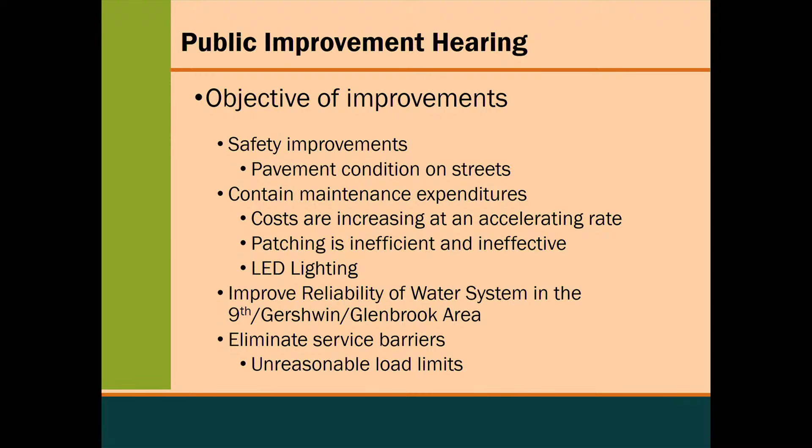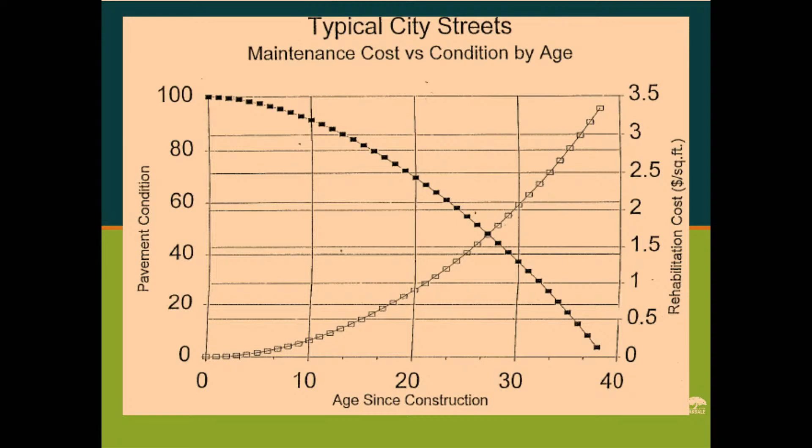The pavement condition on the right side is actually our maintenance costs, and as you see over time, our maintenance costs increase. There gets to be a point - based on data the City of Oakdale has collected - around 28 years of age, where we reach a point of diminishing returns. We're spending a lot of money on maintenance yet our pavement conditions are still depreciating or decreasing. So it comes to a point where we need to do something more than just patch the streets.

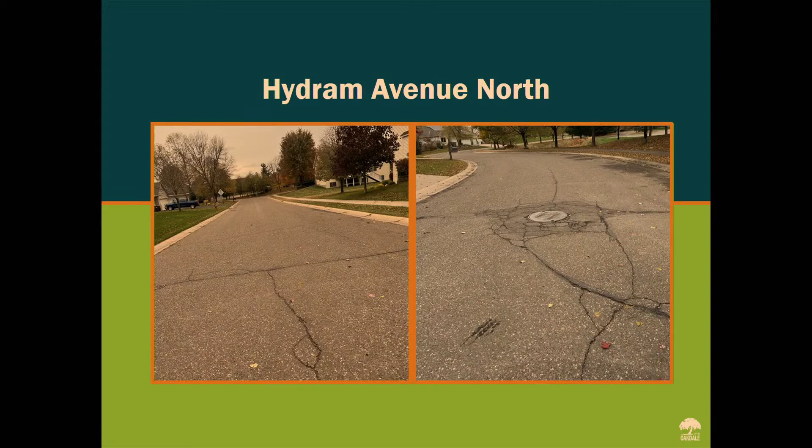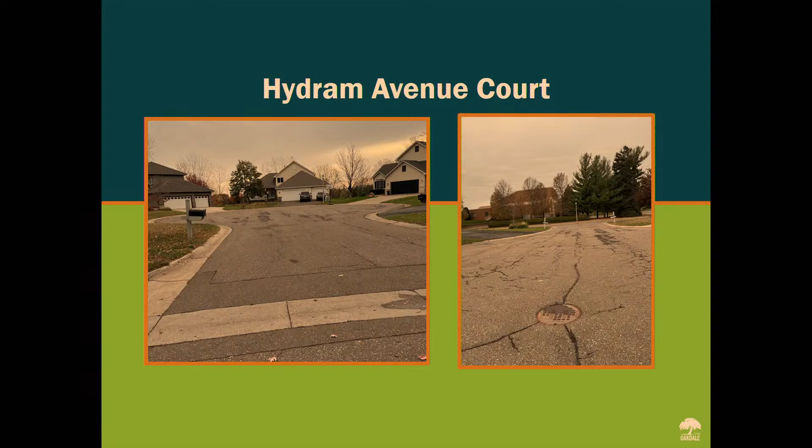Hydram Avenue Court, similar situation. There's a concrete cross gutter on that left picture, and you can see the entire pavement has been patched at one time. And then 17th Street North in that same neighborhood.

So then we'll go through the proposed improvements. There are 5 different areas, as Brian mentioned, and some of the areas have a little bit different character. So I'll go through this as simply as I can, but our main goal, again, is to replace that asphalt pavement.

So the first area are the residential areas by 15th Street and off of Helmo Avenue. In those areas, we will be replacing all the asphalt pavement. Those areas have existing streetlights that meet standards, but they do not have LED fixtures, so those fixtures would be replaced.

Before we replace that pavement section, we want to make sure everything underground is up to standards and in good condition. So Public Works is televising the city sewers at this time, and there may be some spot repairs on the sanitary sewer. There may be some repairs on the storm sewer, some catch basins. Maybe we need to add a catch basin if there's a little bit of a drainage flooding problem in heavy rains. There might be some fire hydrant repairs and gate valve repairs.

And then we will clean out the storm sewer system by the ponds. So the storm sewer pipes that dump into the ponds, there's some sediment that accumulates over time, so this is the best time to clean those areas out. We will review all the street signs in all of the project areas and replace those that need replacing.

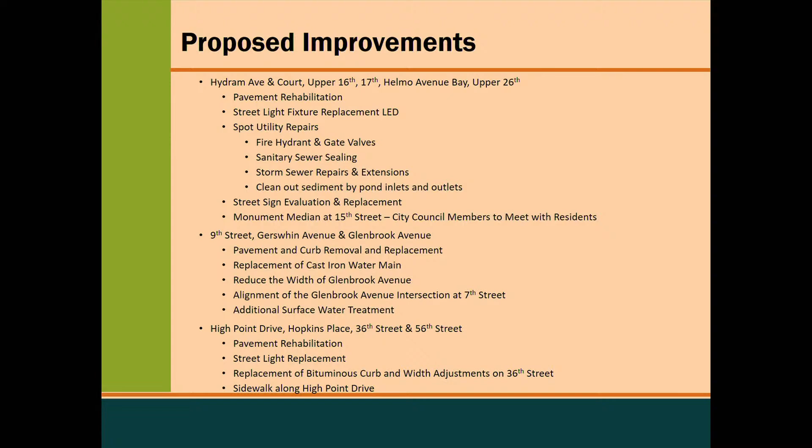So what can you expect to see during construction? Well, the first thing the contractor will do is to reclaim the pavement. They'll bring in a big grinding machine, mix the existing asphalt pavement in with the gravel, and then they'll salvage that and use it on the project.

Before that new asphalt gets put down, we need to take care of some grading, some utility repairs, some curb repairs, and then the street lighting system.

So down in the water main replacement area, that grading, because we're disturbing the subgrade and that subgrade has never been improved in the past, the city standard is to put in 3 feet of good drainable sand because of the soils that exist in the city. So we are proposing to put in 3 feet of drainable sand down in that area. So the grading is more intensive.

In the other areas, the grading will just consist of removing the top 3 to 4 inches of gravel for the new asphalt section. The city has utilities under the street, and there are also private utilities - gas, phone, electric and communication lines. The city has their sanitary sewer, storm sewer, and water mains, so we will be making sure that those are all up to standards and in good condition.

The curb will be totally replaced in the water main replacement area and on the north side of 36th Street. In the rest of the areas, we will replace just the areas that are so severely cracked or settled that it's really affecting the life of the street. So we're not after every cosmetic crack, but we're after the more major cracks, and so you'll see some of that replacement.

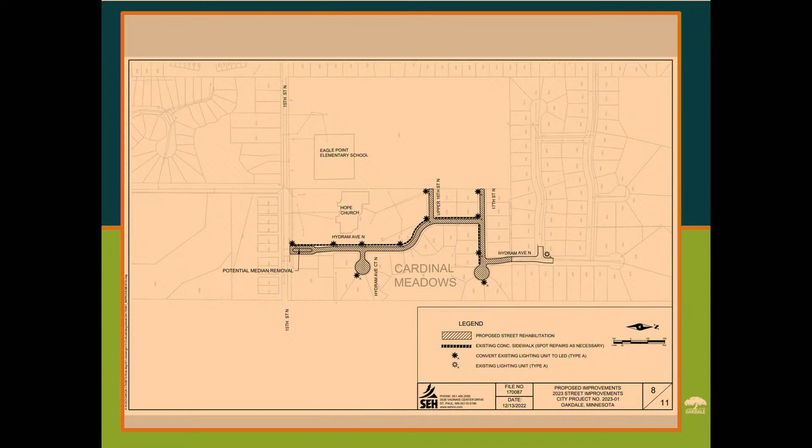So this is the Cardinal Meadows area. Again, some spot repairs on that curb and gutter, total asphalt pavement replacement. The streetlights meet standards, but we'll be replacing the fixtures with LEDs. And then the potential median removal on that south end at 15th.

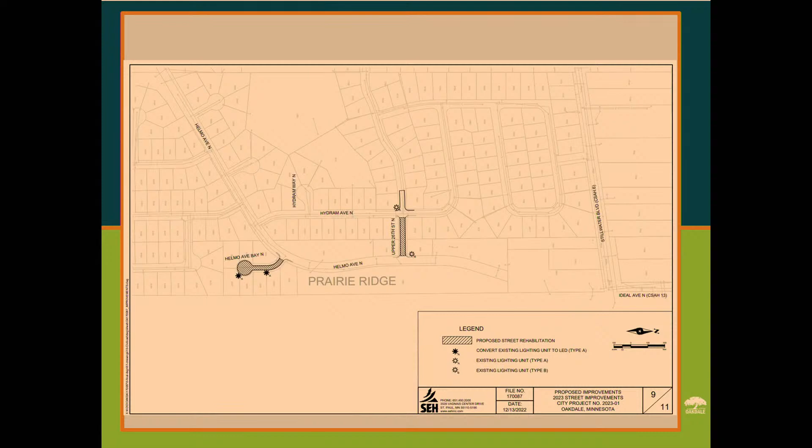Prairie Ridge off of Helmo, similar situation, the curb and gutter will have spot repairs, asphalt replaced, and those lights also meet current standards on Upper 26th, but on Helmo Avenue Bay, they will be upgraded to LED fixtures.

Down near Tanner's Lake, in the water main replacement area, that's the big activity down there. New curb and gutter, new pavement. The streetlights, again, are overhead, so they will remain overhead.

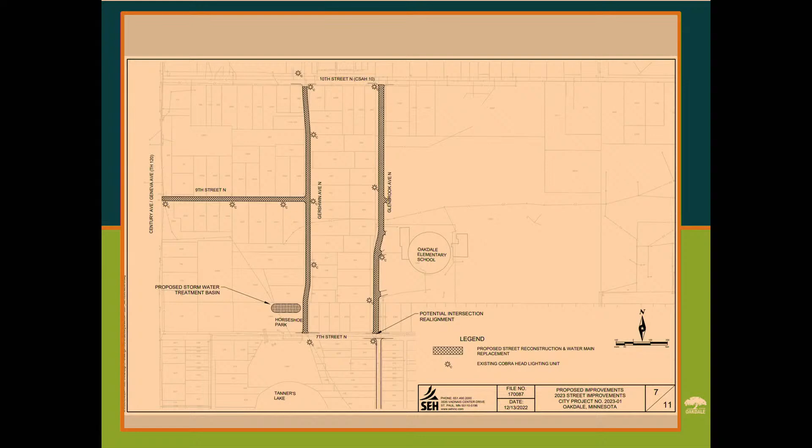And there is some stormwater treatment required. We're proposing that on the north end of Horseshoe Park. And then there's the potential realignment of that Glenbrook intersection down at 7th Street.

The commercial area up by 4Front. The work on High Point and Hopkins is just work in between the existing curb.

New streetlight system with the city standard for the commercial areas, the taller pendant type lights. There's a new sidewalk proposed again on the west side of High Point.

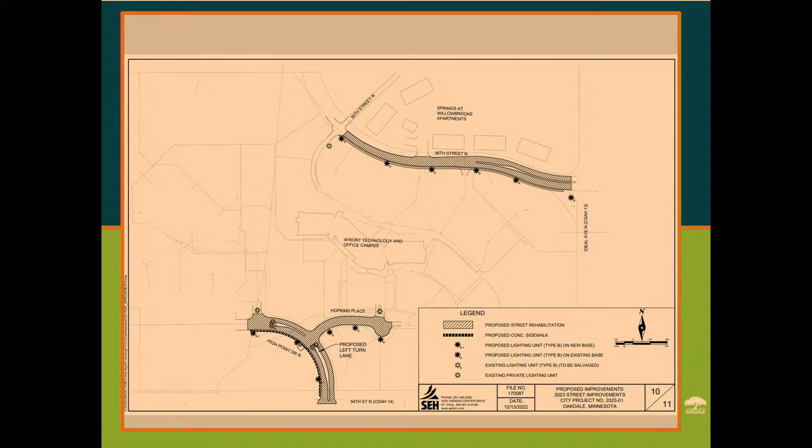Then up on 36th Street, new concrete curb on the north side, new lighting there, pavement replacement, and the trail will also be replaced on the south side of the road.

Then lastly, 56th Street up near Mills, work in between the existing curb and gutter, some spot repairs, pavement replacement, and new standard city commercial streetlights.

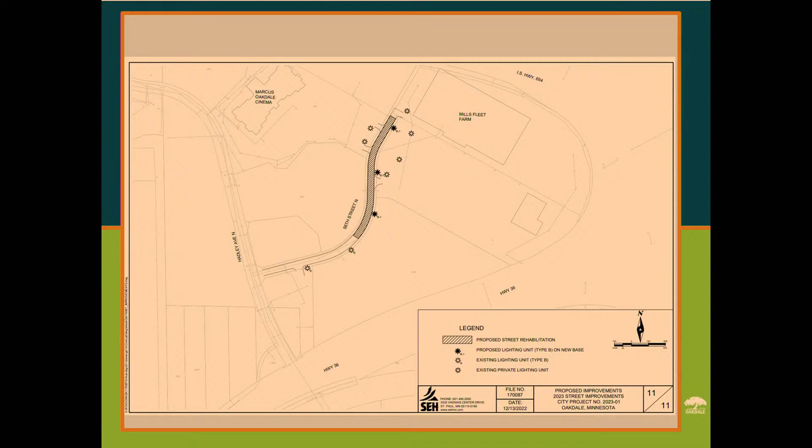These are just some cross sections. It shows down in the water main replacement area that we are proposing a 3-foot sand section, new curb and gutter.

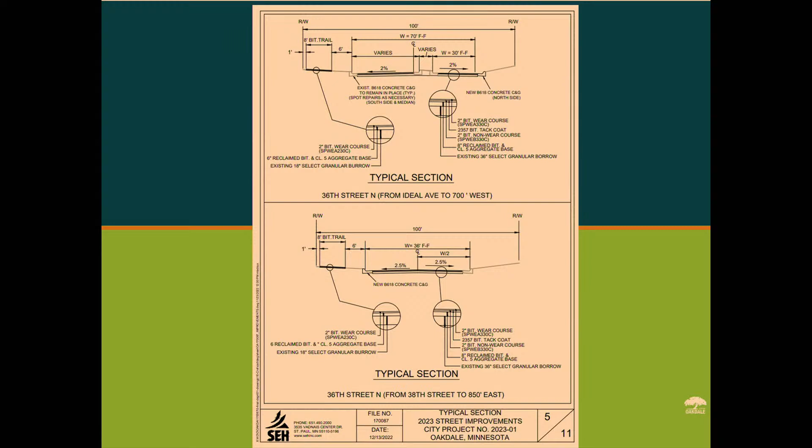And then this is on 36th Street, showing how we transition from the median area to the Willowbrook area, and then the trail replacement on the south side.

So we started this process out by sharing some information in November. There were some videos that were posted and information shared, some letters that went out. The feasibility report, we did a study and a report that was presented to the council in December. These public hearings were ordered.

If the project goes forward tonight, we will work on the construction plans and then bring those back to council on March 28th for approval and approval to bid. A contract could be awarded at the second meeting in April.

And then we really want to just be ready to go around the beginning of May and have a contractor on board, so when the frost is out of the ground, they can start the construction. And then also we want to finish everything except for maybe some minor cleanup by about the end of August. So that is our schedule.

Thank you, Todd. The next part of the process here is to give the residents an opportunity to comment on the proposed improvements, and then for the council to deliberate on the improvements and determine if they want to order the project, and it does require a 4/5 vote.

With that, I turn it back to the mayor. Thank you, Brian. Before we open the public hearing, I'm going to open up to council members to see if there are any questions on the presentation for Brian or Todd.

Yeah, I did have one question. In the south, if we were to consider narrowing the street, would that change the boundary lines or the lines for the owners in that area? Or would the extra space for narrowing the street just remain an easement for the city?

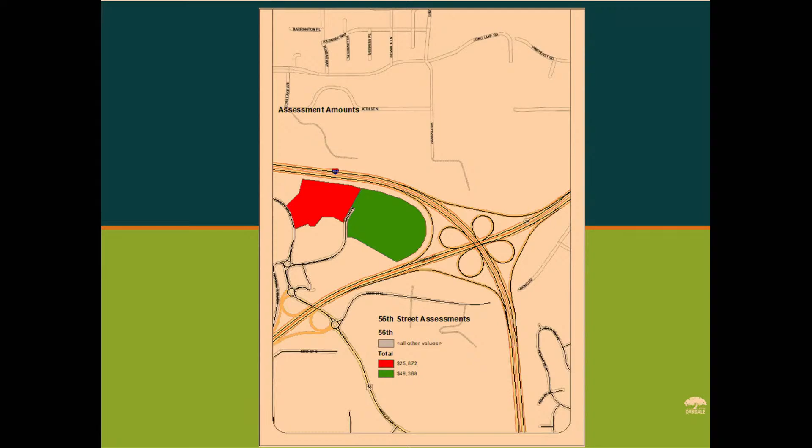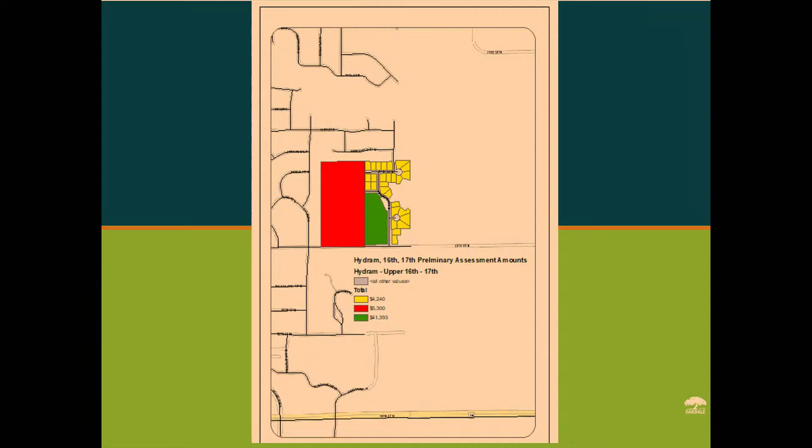This is the Prairie Meadows. These assessments are $4,240. It's a typical 80-foot lot. Similarly, in Cardinal Meadows, the yellow is the $4,240. The school district does have frontage on the 2 dead-end streets, so they have an assessment, and then Hope Church has frontage along Hydram and Upper 16th, so their assessment is $41,000.

Then the Gershwin in Glenbrook and 9th Street area, the orange is the $6,160 for the typical single-family lot. There are some multifamily properties right off of 120, so they have a different assessment number. The school district also has 2 parcels with frontage on Glenbrook Avenue, so there are some assessments there. The other unique property is right off of 10th and Glenbrook. There's a parcel here of sufficient size that it could be subdivided, so it's the equivalent of 2 lots, and they also own the vacant lot to the south. So this particular property has three assessments on that parcel.

Earlier this evening, you saw how many streets we've reconstructed since 1992. This is just showing the number of parcels that have been assessed since 1992. It's close to 9,500 parcels, and for purposes of comparison, the city of Oakdale has a little over 10,000 parcels in our community. So well over 90% of the properties in Oakdale have been assessed for street improvements following similar policies that we're discussing tonight.

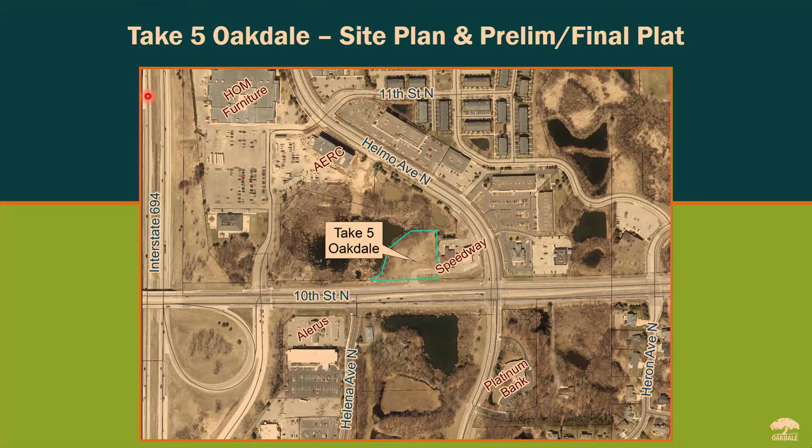So the location of this request is on the north side of 10th Street, immediately west of the Speedway and west of Helmo Avenue. This is a vacant parcel consisting of 1.5 acres, and the purpose of this request tonight is to create 2 commercial lots. Development is being proposed on just the east lot for an oil change business. The west lot will be developed at a future time, and this site is zoned as C2 community commercial.

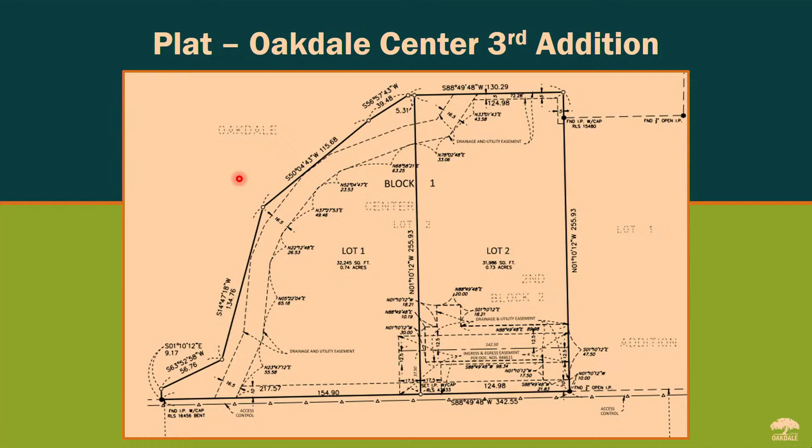Here's a look at the plat. The site will utilize the existing access and drive to the Speedway for the development. Both lots are approximately 3/4 of an acre each, and there is an existing drainage and utility easement, as you can see on the west side, because there's an outlot owned by the city that contains wetland.

Here is a look at the actual site plan. Again, only the east lot is being developed at this time. The west lot will have to go through the site plan process when it is ready to be developed. In terms of circulation, traffic will turn right off 10th Street heading north, loop around, and then there will be 3 service bays for the oil change stalls, with a bypass in case a car needs to go around, or for EMS purposes. There are 10 parking spaces on the north side of this site.

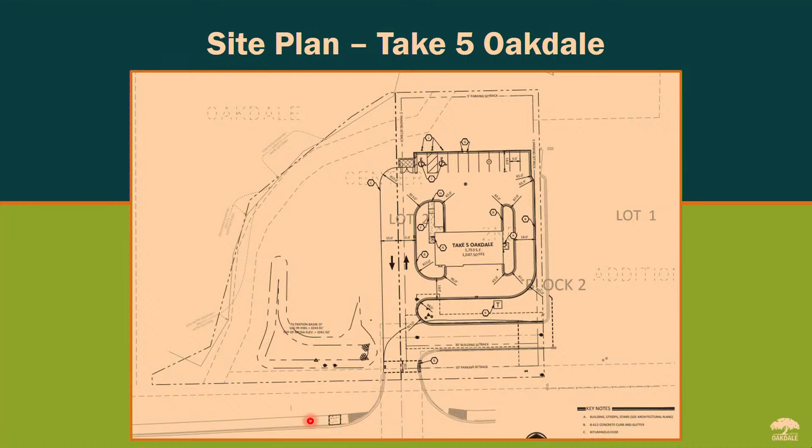Stormwater will be handled through a basin on the west lot. Washington County reviewed this since the site fronts 10th Street, and they recommend that the developer pay for striping of a right turn lane off 10th Street, with additional permits and approvals required through the county for any right-of-way work and access for the site. The city is also recommending that the developer work with Washington County to ensure that this segment of the trail system on the north side of 10th Street is ADA compliant.

Here's a look at the rendering of this oil change business. The exterior materials consist mostly of brick, which complies with our ordinance design standards. Signage for this property will need to comply with our signage standards. In closing, staff recommends approval of both the preliminary and final plat, as well as the site plan, subject to certain conditions found in the resolutions in the packets.

And I will briefly summarize those conditions. First is execution of a development agreement. Next, the developer must receive approvals from the city engineer, fire department, Washington County, and Watershed District.

Conditions include satisfaction of park dedication, compliance with the city attorney's plat opinion, submission of an updated photometric plan that complies with ordinance standards, and finally, the developer paying for striping of a right turn lane off 10th Street. Just a reminder, this is a public hearing, but otherwise I'd be happy to answer any questions.

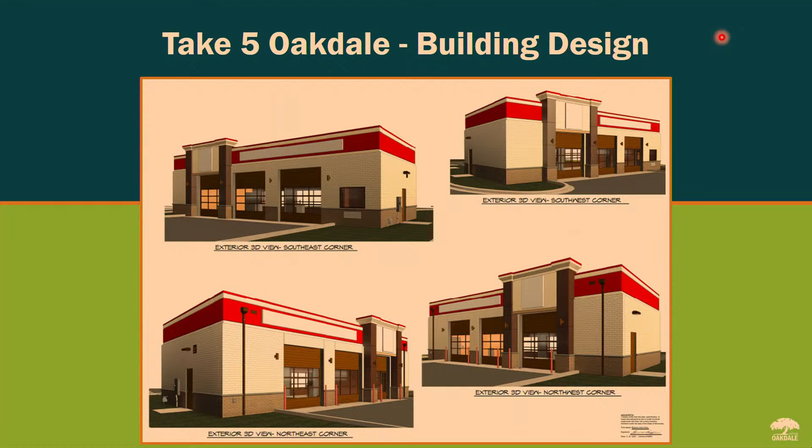I have a question related to disposal of the oil. Have they addressed that? I'm sure they have, but what does that look like as far as disposal and containment? Yeah, that's all regulated by the Minnesota Pollution Control Agency, so there's state regulations. I'm not as familiar with the federal regulations, but that's all handled at the state level. The city itself doesn't have any particular regulations about that, but that's state requirements.

We are required to hold a public hearing on this, so let me go ahead and open the public hearing. Anybody that wishes to speak on this proposed development is welcome to join us at the podium. Same rules apply: please state your name and address for the record and share any thoughts you may have. Seeing none, I'm going to go ahead and close the public hearing and bring it back up to the dais for council discussion. Council members, anything?

Hearing none, let's go ahead and take both of these one at a time. Could I have a motion on the first one? I will make a motion to waive reading and adopt Resolution 2023-12, approving the preliminary and final plat for Oakdale Center 3rd Addition, with conditions included in the attached resolution. There's a motion, is there a second? Second. Motion and a second. Any conversation? Hearing none, all those in favor say aye. Aye. All those opposed? And that passes.

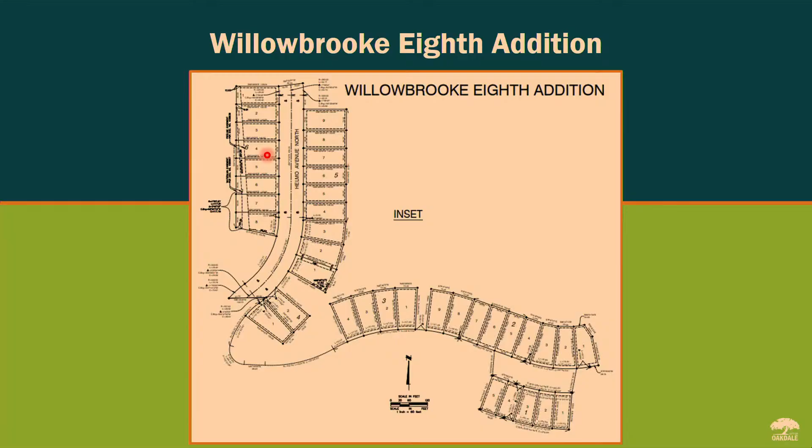Council members, any questions for staff or the developer? No? No. All righty.

Hard to believe we're on the 8th Addition for Willowbrooke. With that, I will entertain a motion.

I will make a motion to waive reading and adopt Resolution 2023-11, approving the final plat for Willowbrooke 8th Addition with conditions as outlined. There's a motion. Is there a second? Second. Motion and a second. Any conversation?

Hearing none. All those in favor say aye. Aye. And opposed? And that plat is approved.

You want to keep going, Luke? Sure. Oh, okay, so the next item.

Next item is a continuation from the last council meeting, so this is a site plan. It's actually site plan option 2 for the 4Front commercial retail site, and I do have an image here. Just a reminder, the location of the site is on the north side of 34th Street, located in the 4Front campus. It's a vacant 8.5 acre parcel.

At the last council meeting, recall that site plan option 1 was approved, and that features a grocery store and other commercial uses. This site plan option 2 was deferred due to concerns about the proposed car wash. Following that meeting, the developer did revise the site plan to remove the car wash. Here's a look at that revised plan.

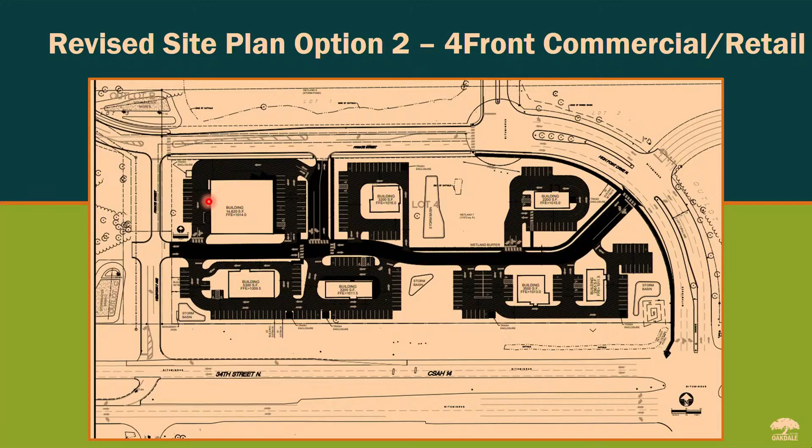The developer is here, and otherwise staff is happy to answer any questions. Thank you, Luke. Council members, any questions for Luke or the developer?

Seen this before, just a small change. Looking good. I will entertain a motion. I will make a motion to waive reading and adopt Resolution 2023-06, approving a revised site plan option 2 for the 4Front commercial retail property with conditions included in the attached resolution. There's a motion, is there a second? Second. Motion and a second. Any final thoughts? All those in favor say aye. Aye. Opposed? And that is adopted as well.

Oh, we're just rolling right along. City Attorney Jim Thompson, you're up next. Anything? Mayor and council, nothing specific to report, but happy to answer questions. Thank you, Jim. Any questions for Mr. Thompson? No. Administrator's report. Welcome, Ms. Volkers.

Thank you, Mayor and Council. I do have one item I'd ask, I mentioned it earlier, to be added to the agenda. We will upload an RCA and a resolution about local option sales tax and preserving our right at the legislature to have the discussion about considering ways to adjust for inflation in the future. We're not committing to anything. Any action would be a future action, but what the resolution does in front of you is it just preserves our right to have that discussion with the legislature. The motion I'm recommending, and again, I will upload this all to the website after the council meeting tonight, is to waive reading and adopt Resolution 2023-14, which is new, but it amends the old Resolution 2022-86 that we previously approved on this. So, it is regarding the local option use and sales tax and the 2 projects, and the fact that inflation is affecting our projects significantly. So with that, I'll stand for any questions.